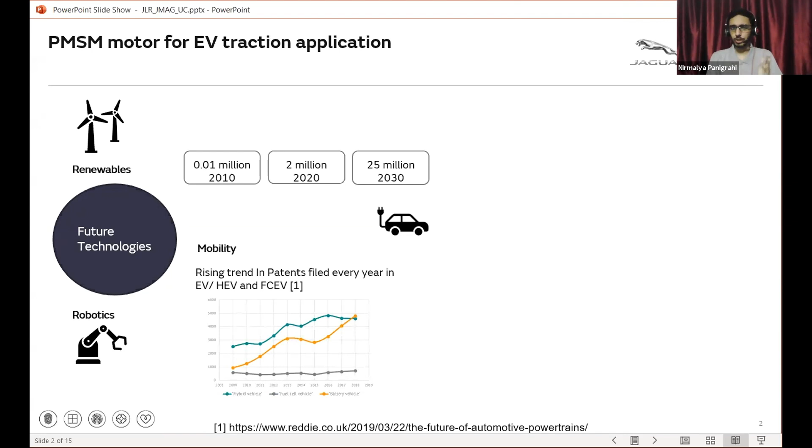Not only the numbers, the trend in the number of patents filed every year in the field of electric vehicles, hybrid electric vehicles, and fuel cell electric vehicles shows a meteoric rise. Therefore, we are convinced that this part of the century belongs to e-machines. We at Jaguar Land Rover have reimagined our design thinking to build a sustainability-rich, unique customer experience with a positive societal impact. We want to embark on a net zero carbon business by 2039, and from 2025, we want to build an all-electric fleet to unlock the unique potential of Jaguar Land Rover.

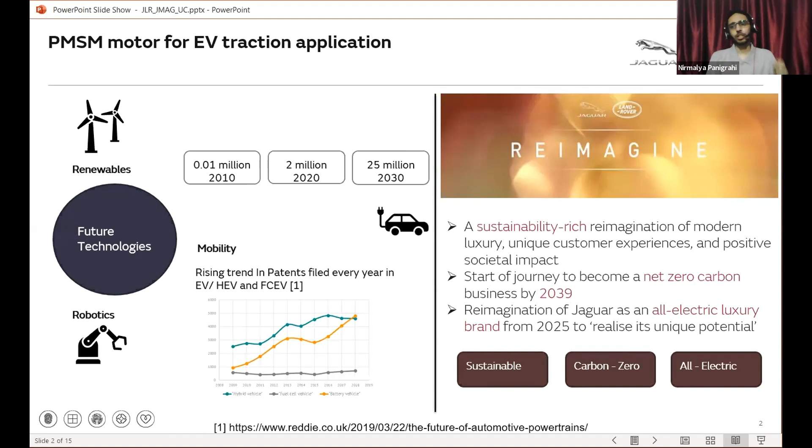The implication of all these factors is huge volumes and competitiveness for the e-machines. Thus, factors such as the performance, showing the torques, speed, and operating conditions, the efficiency, showing the losses occurring in the e-machine, and the reliability and sustainability of the e-machines become vital. Considering the global scale, even a small amount of savings in the e-machines can result in massive savings. From the perspective of a single machine, the reduction in losses can result in better efficiency, higher torque density, and high power density.

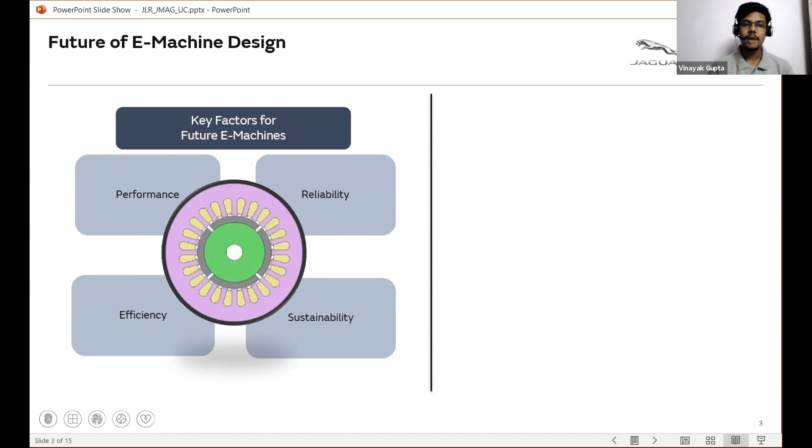One type of losses that occur in the e-machine is the electromagnetic losses. The electromagnetic losses occur in regions such as the magnet, rotor, and stator. The core losses, that is, the losses occurring in the rotor and stator, in general occupy the highest proportion of the total losses. There also has been a lot of research as well as various methods developed to calculate the core losses, such as the modified Steinmetz method, the Bertotti method, and the modified Bertotti method.

The losses are again of three types: the eddy losses, the hysteresis losses, and the copper losses. The eddy loss is due to the induced current from the fluctuation of the magnetic field. The hysteresis loss is produced due to the self-magnetization fluctuation in the external magnetic field. The copper loss, as the name suggests, is the losses occurring in the copper windings.

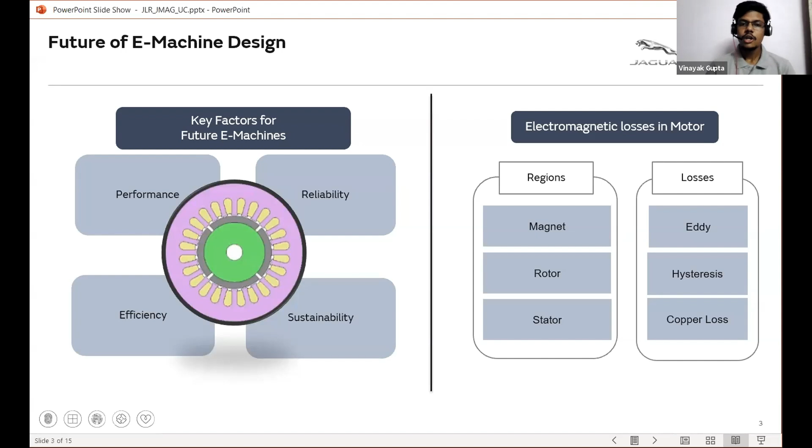This presentation is scoped only towards the magnet eddy losses, the reason being that even though it occupies a smaller proportion of total loss, we already have well-developed methods for the calculation of core losses, and the magnet eddy losses do become higher in certain operating conditions. So today, we will be developing a model as realistically as possible and then estimating and reducing the magnet eddy losses through simulations in JMAG.

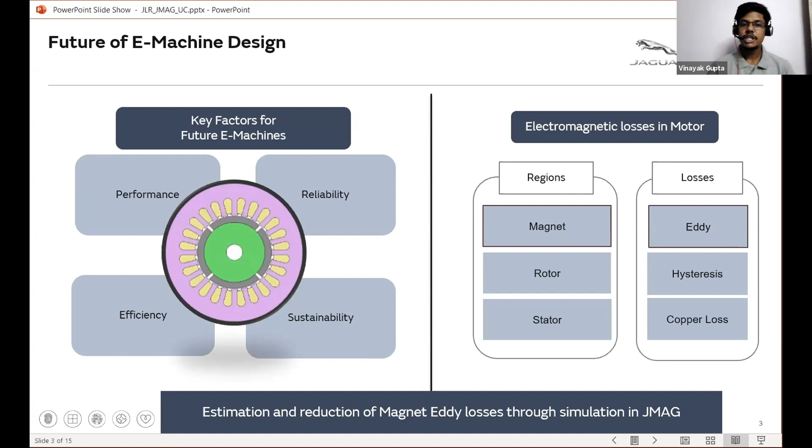Now, as Vinayak explained here, when we come to magnets, the hysteresis losses and the eddy losses are two of the most important losses we should be looking at. Now, specifically in EV traction applications, since our magnet parts are not exposed to repeated magnetization and demagnetization cycles, the hysteresis losses are not much prominent. However, there are current loops passing through the magnet parts and there are eddy losses. Therefore, we believe any activity which focuses specially on magnets and wants to measure its losses must actually focus a lot on these eddy losses.

Now, a brief background of what eddy losses are. To start with, these are extremely relevant at high speed operating points and when the carrier frequency of the inverters powering the stator coils is high. Now coming to the effects. Since it's due to the current loops formed and the induction heating, eddy losses tend to raise the temperature of the magnet parts, thus bringing in the risk of a thermal demagnetization. Again, since a part of the input power is lost in terms of heat, there is a reduced efficiency. Therefore, we now have to go back and increase dimensions of the machine, thereby reducing the torque density.

Coming to the analytical side of things, there are majorly two components of the eddy losses. First is independent of the stator excitation, called the no-load component. This depends a lot on the stator geometry, specifically the reluctance variation due to the stator slot openings. The other component, which is due to the current flowing in the stator coils, is mostly contributed by the spatio-temporal variation of the magnetomotive force and its harmonics. Moving forward.

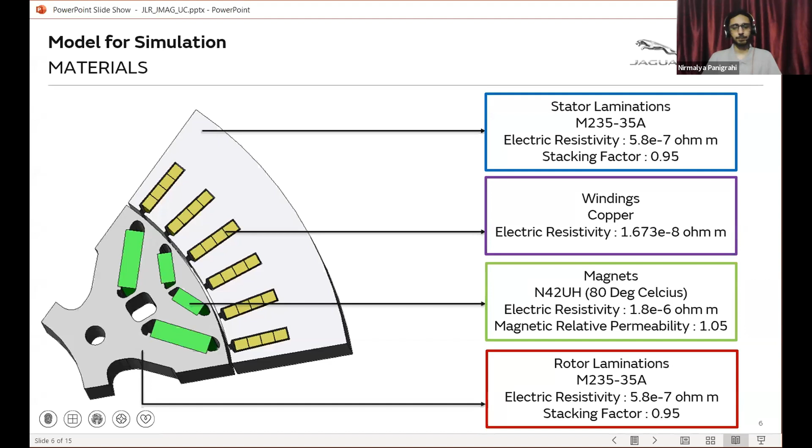We took a look at the design of our rotor laminations and the stator laminations. Now let's see what kind of materials we used for the simulation. To start with the stator and the rotor. In each of them, we used an alloy steel of grade M235-35A. Now, to simulate the effect of laminated sheets of alloy steel, we used a stacking factor of 95%. Coming to windings, we used pure copper. Lastly, in magnets, we used magnets of grade N42UH, assuming an operating temperature of 80 degrees Celsius. Other important electrical properties of these materials have been listed in this slide. Going forward.

So one of the important conditions while evaluating the magnet eddy losses using FEA is the insulation boundary condition. The figures shown here represent the magnet configuration of a single stack, single pole, because this is the model over which we will run our simulation and then scale the result for the whole 7 stacks and 8 poles.

On the left-hand side, we see that the magnets do not have the insulation boundary condition applied over the ends. This means that the magnets of 2 separate stacks are not electrically insulated from each other. Thus, when the eddy currents are induced into the magnets, the eddy loops formed in the magnets will be formed throughout the 7 stacks as a single piece.

This means higher cross-sectional area, higher magnetic flux through it, and thus higher induced magnetic eddy currents, and thus higher magnet eddy losses. On the right-hand side, we see that the magnets have the insulation boundary condition applied over it. This again means that the magnets of 2 separate stacks are now electrically insulated to each other.

Thus, when the eddy currents are induced into the magnets, the eddy loops will be confined only to one stack, thus reducing the cross-sectional area, reducing the magnetic flux through it, and so reducing the eddy currents within the magnets and thus lower magnet eddy losses. This means that the insulation boundary condition is a must while defining the model, because this makes your model as close to the real conditions.

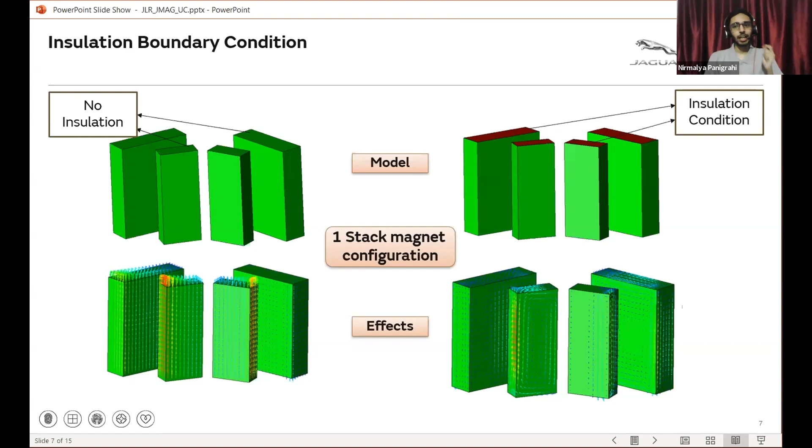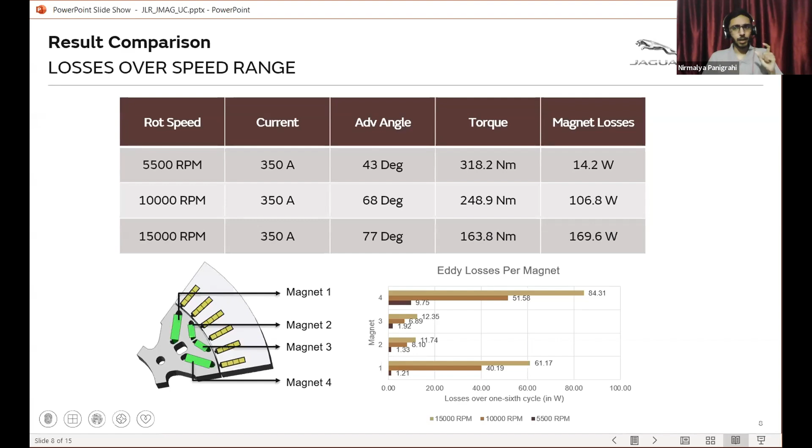Here we observe that as we move higher up in the speed ranges, the proportion of losses coming from the bigger magnets tends to increase. Therefore, another important conclusion from this slide is that if we want to reduce the magnet eddy losses, we should concentrate on the larger magnet parts and effectively work on a strategy which can help us achieve that.

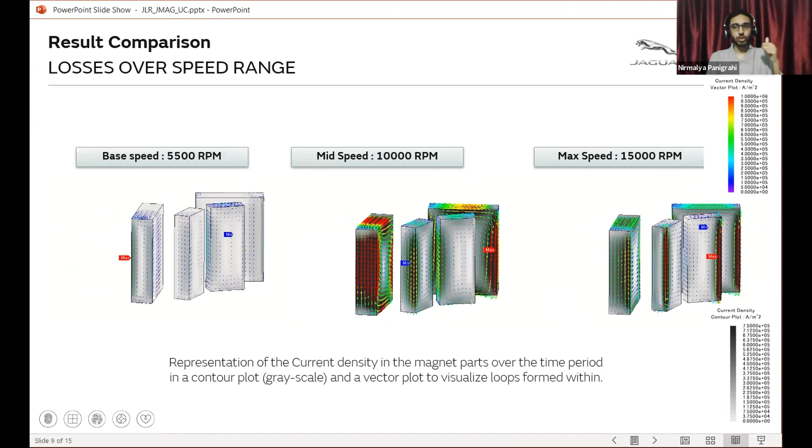In the next slide, I would like to show you a brief demonstration of how the current density varies in the magnet parts at the 3 speed ranges. Also, I've included a vector plot so that you can identify the current loops forming in these magnet parts. Here, as you can see, at the max speed, there is an unusually high current density, which explains why we saw such bigger losses at those speed operating points. Moving forward.

After seeing the results of the unsegmented magnets, we now see how we can reduce the magnet eddy losses. One of the ways to reduce the magnet eddy losses can be through the change of materials, like choosing a material which has higher electrical resistivity, or a material which has lower magnetic permeability, or you can operate the e-machine at a less aggressive operating condition. That means a lower stator current. However, one of the ways in which we can reduce the magnet eddy losses and still need not worry about the operating condition or the change of material is through the segmentation of magnets.

Again, the figures shown here represent the magnet configuration of a single stack, single pole. On the left-hand side, we see the unsegmented magnets. Unsegmented here means that no further segmentation has been performed over the magnets of a single stack. This means that the insulation boundary condition over the magnet ends here still holds. And the result for this type of configuration, Nirmalya just explained.

So in order to go ahead with the study of magnet eddy current reduction through the segmentation of magnets, we perform two types of segmentation, the axial segmentation and the radial segmentation. In the middle figure, we see the axially segmented magnets. Here, all the 4 magnets have been axially segmented to result in 8 magnets. On the right-hand side are the radially segmented magnets, where the larger magnets have been radially segmented, again, as explained by Nirmalya, because the larger magnets create higher eddy losses.

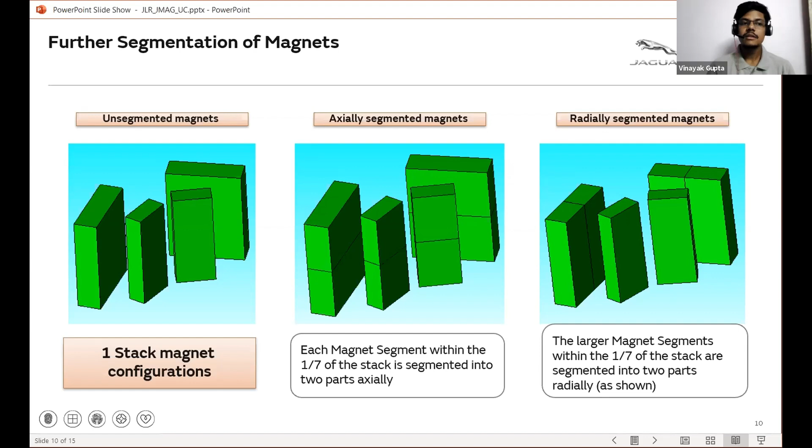So having defined the segmentation of magnets in the axial and radial direction, we will now solve both of these models and then compare the results with the unsegmented and among all of them.

Exactly, Vinayak. Now, in this slide, we build upon the results that we had collected in our last set of experiments. Here again, you can see we have the 3 speed ranges, the base speed, mid speed, and the max speed ranges, and have maintained the operating conditions having the exactly same current advance angle and same torque output as always. Now, here we concentrate on how effectively our strategies of magnet segmentation are working out.

Let's start with it. At the base speed, we see that both axial and radial segmentation are giving us a 40% reduction in losses. Again, at the mid-speed range, the reduction in losses is in the higher 30s. When we move into the max speed ranges, the reduction in losses comes to the early 30s.

Another conclusion from here is that radial segmentation tends to become more and more powerful as we move higher up in the speed ranges. As you can see, at the mid speed, it is nearly 3% better than axially segmented magnet parts. And at the max speed, it tends to become nearly 5% better.

Therefore, one conclusion from here is that overall in the complete operating range, we can expect around a 35% reduction in losses from magnet segmentation. This is roughly 1/3 of the losses that we saw in the unsegmented magnet parts. And radial segmentation tends to become more useful and advantageous as we move high up in the speed ranges.

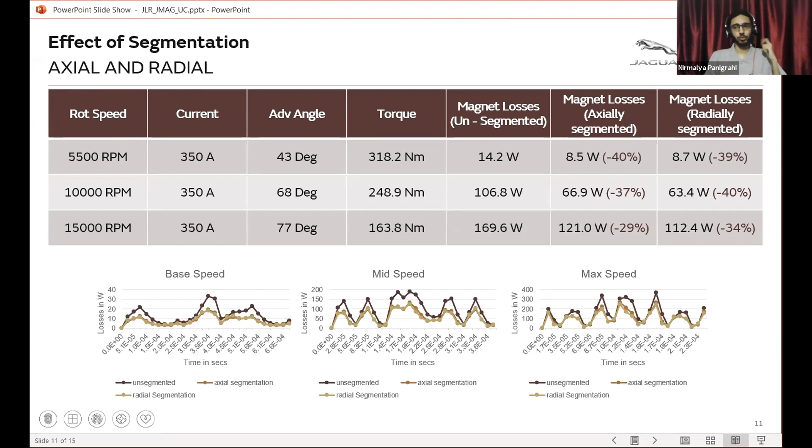So we saw how to reduce the magnet eddy losses. But how can we make the model itself very close to the real conditions? So till now, the simulations that we performed were over a single stack, single pole, which does not have any skew, which in general is a very standard practice in the e-machine industry, owing to its benefits of low torque ripple and better performance.

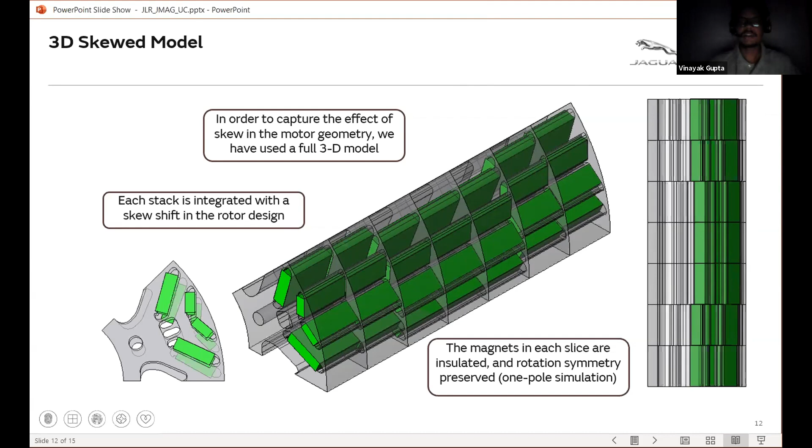So in order to develop the model as realistically as possible, we develop a model which has a skewing built into it within every stack. So this model here also possesses some symmetries. One of the symmetries, as can be seen, is the rotational symmetry, and thus we use only a single pole for the simulation. However, as we said, this model has a skewing which can be seen in the figure.

There still exists one level of axial symmetry, which is exactly through the middle of the whole e-machine. So as we see, there are 7 stacks and it can be sliced through in between to result in 3.5 stacks. And then we perform the simulation over those 3.5 stacks and a single pole. This model also has the other similar conditions applied to it as the single stack, single pole had.

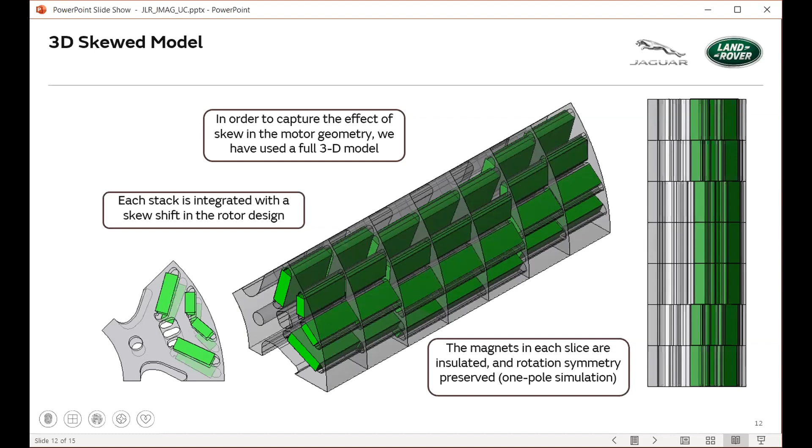That means it has the insulation boundary condition applied over the magnet ends. Again, these magnets are not axially or radially segmented. We can call them unsegmented magnets with insulation boundary condition. This has a semi-automatic mesh development. So this completely defines our model. And now, having defined the model, we solve it and move towards its results.

So as we can see, the skewed model has also been simulated over the same operating points. That is, it has been simulated over the base speed, 5,500, mid speed, and the max speed with the same current and advance angle. Coming to the torque produced, we see that the variation is within 5%. For the base speed, we see that the torque is lower, but for the max speed, we see that the torque is higher.

So according to the simulations that we have performed, it's not that the skewed model produces either lower results or higher results. It just produces them similar to what the no skew produced, but the maximum difference is within 5%.

Now we come towards the magnet losses. The magnet losses are even more similar, as we see the 13.5 watts, 14.2 watts for the base speed, the 105, 106, 171, 169. Even at the maximum speed, when the magnet eddy losses are the highest, we see a maximum difference of only 2 watts, which means that the magnet losses are pretty similar.

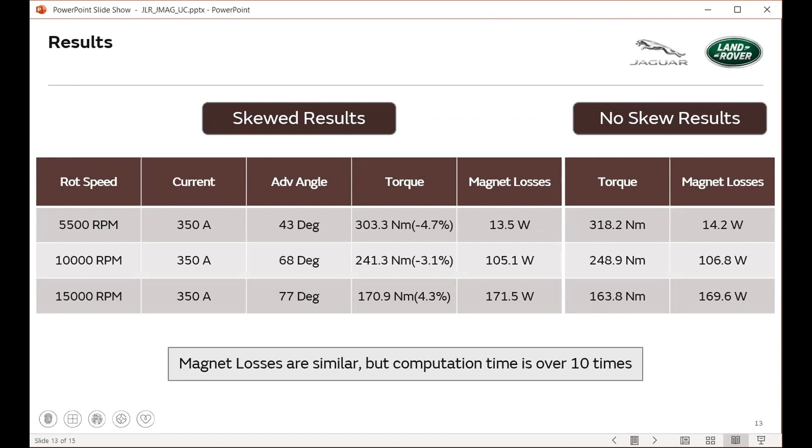Of course, the computation time here was a lot different. We can conclude here that because the computation time taken by the no skew model is 10 times better than the computation time taken by the skewed model, and at the same time producing similar results, we can say that the single stack and single pole model can be used for the simulation to get the results.

Well, now I would like to give an overview of this complete journey we had over this seminar talk. First of all, we started with basic designs, materials, and boundary conditions. The first result we saw was the variation due to operating speed. What we observed there is that at high speed operating points, we have significantly higher magnet eddy losses reported. We looked a bit into how these losses were divided among the magnets, and we saw larger magnets were giving proportionally higher losses. Also, it was important there to see that from base speed to max speed, there was almost a 12-factor rise in the losses produced.

Then we moved into our strategy of magnet segmentation. In magnet segmentation, we compared results between 3 strategies. First, leaving them unsegmented, second, axially segmenting them, and third, radially segmenting them. We saw overall there was roughly around 35%, which implies one third of reduction in losses while implementing the strategy of magnet segmentation. Also, we observed that radial segmentation tends to become slightly more advantageous as we move into the mid speed and the max speed ranges, roughly around a 5% difference, so radial segmentation can be seen as a better strategy than axial segmentation in our study.

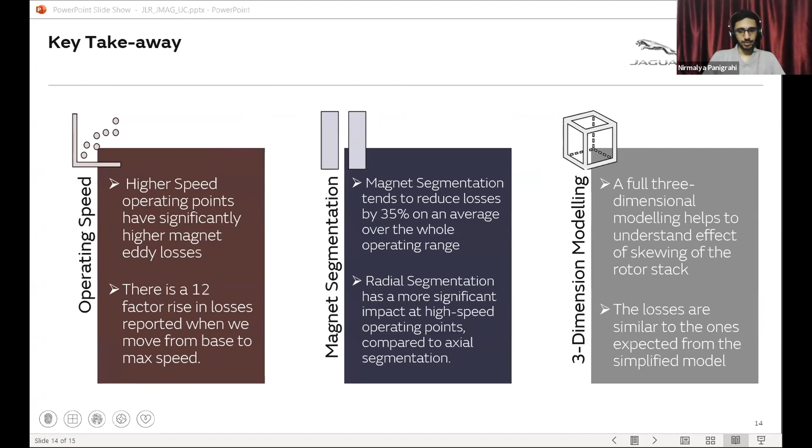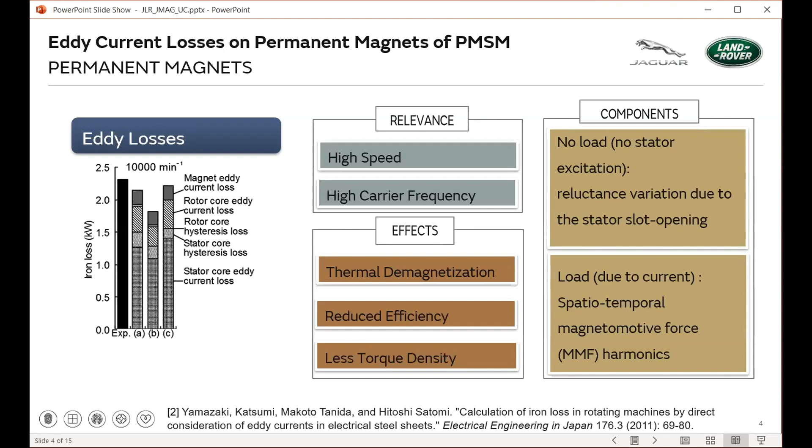Okay. Thank you. And maybe one last question. What is the calculation time for those 3D calculations? Did you use the flux gap boundary condition in JMAG? Yeah, the calculation time for the 3D calculation for 3.5 stacks, considering a symmetric condition, and for one pole was roughly around, I believe, 5 to 6 hours. Yes, correct. And for one stack, one pole, it was half an hour simulation.

And we did not use the flux gap boundary condition. We developed a model and meshed the whole 3D model and ran our transient analysis on that, rather than extending it from a 2D transient analysis to a 3D frequency analysis, which makes use of the flux gap boundary condition in JMAG. We did it in a 3D transient magnetic analysis. Okay, thank you for your answer.